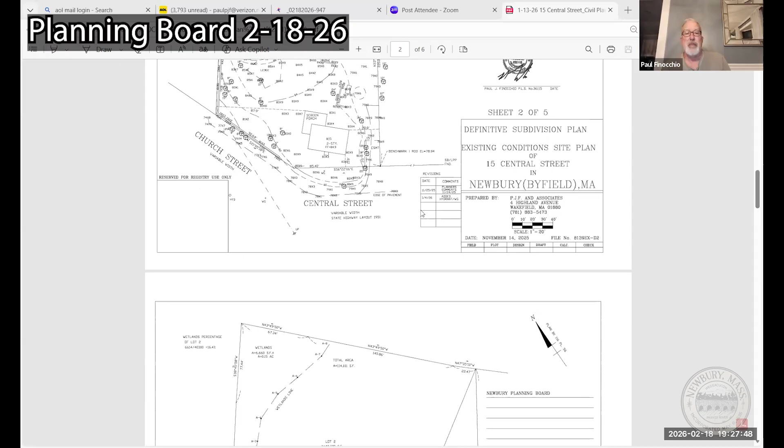Page 3 is a by-right plan showing a 50-foot layout with a required cul-de-sac turning radius. This is showing basically the 2 lots, showing they can do this as a by-right plan without asking for any waivers.

Sheet 4 is a proposed subdivision showing the roadway coming into the site. We'll be having access at the end of the site to the second lot over here, which will have the proposed duplexes. And this will be the existing lot carved out for the new house beyond this side.

This is the definitive site plan. We'll be showing access coming into the site, dead ending. And then we have a duplex location here with a septic system somewhere located out in the rear.

The road is a 22-foot wide paved area coming in. We do have a 34-foot radius paved area here that was required by the fire department. And also we had to make sure that we did not hit or come close to an existing utility pole out front.

There will be retaining walls along the roadway area. Those will probably be cut out in the ledge, so we're not sure on exact height once we do start cutting and seeing how stable that ledge material is.

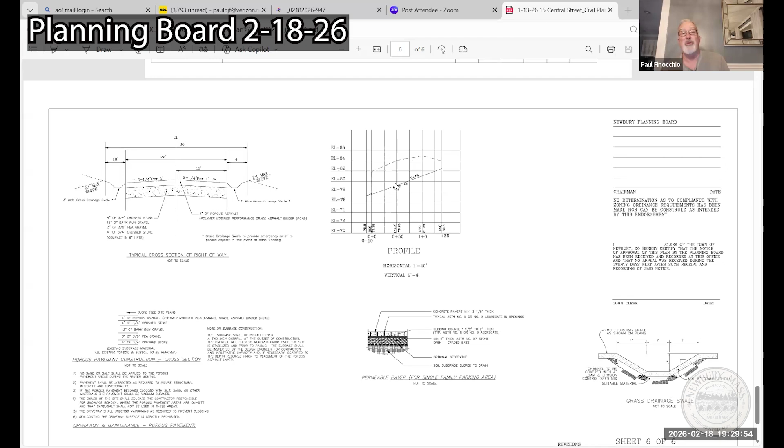Sheet 6 is basically just a detail. Again, we will be changing the pavement from a porous pavement to an impervious material. So this is just a detail sheet, showing the roadway profile coming into the site.

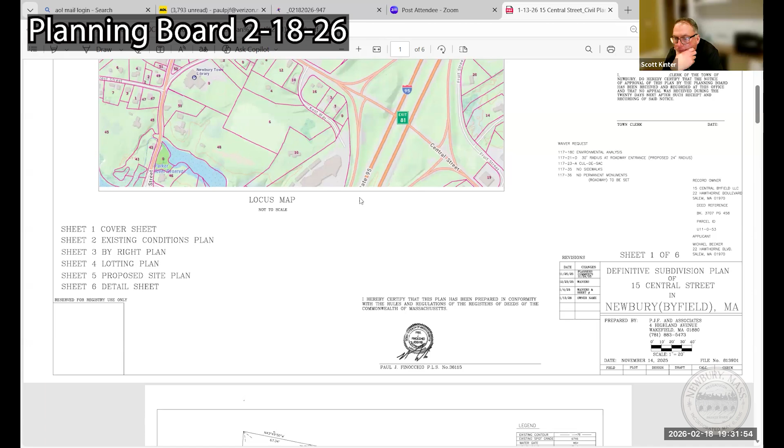Hold on one sec, please. Mr. Rogers, if you can't get in, please call back in, okay, and speak up. Yeah, I'm right here connected, so I can hear you, and I'll turn my mic off now. No worries, and if you want to raise your hand, it's star 9. Thank you so much. No worries, just want to make sure you're able to participate. Yeah, thank you, I'm sorry about that. If you want to answer Scott's question, I apologize. I just want to make sure the public can respond.

So to answer the question, Robert Grasso on October 29th, 2025 did the soil testing, and Deborah Rogers witnessed the soil testing as the Board of Health agent.

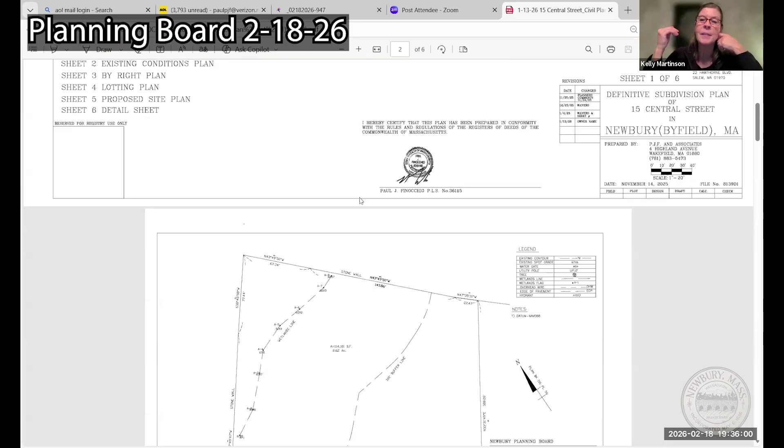Can you just say your address again, Kelly? 11 Central Street, Unit 3. I'm in the church, the old church.

Is the mailbox located across the street from your residence? Yes. I mean, we can work with you to find a location for the mailbox. If it's where we're showing the driveway to go, we'd have to relocate it, but we could work with you on that.

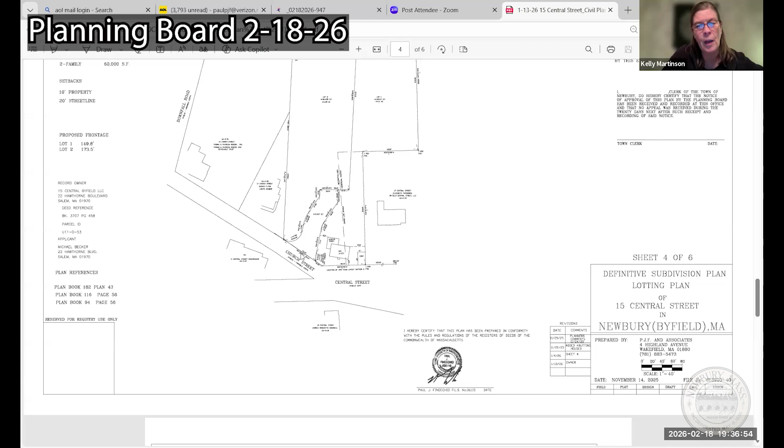Any other questions, Kelly? Well, there was already a car accident from the next door neighbor, the house that's pending. There was a car accident from that neighbor pulling out of the driveway into our neighbor's car a few months ago on the street. So I just want to say that there is a little bit of congestion there. Then it would be 3 driveways. Congested, do you know what I mean?

And Church Street's a one-way there, correct? Correct.

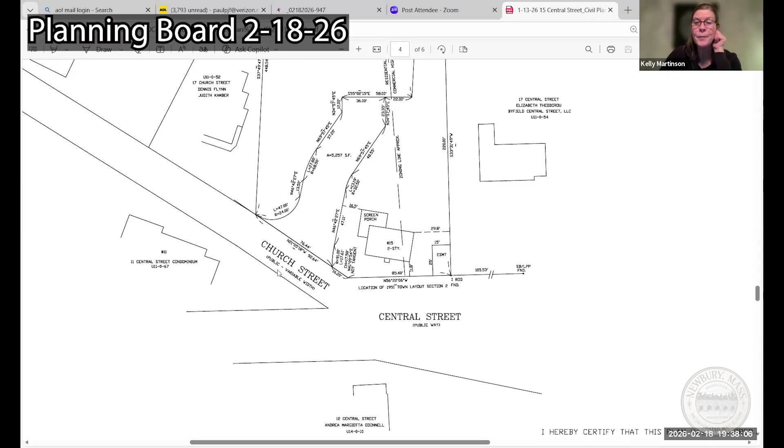Any response from the applicant on that? I'm not sure exactly where the mailbox is, if it's located across the street in this area here, right where the driveway is proposed. Well, here's the roadway right here. I don't know if you're looking at the screen, and then this is number 11 Central Street, and I think the parking is over on this side and here, but I don't know where that mailbox is per se. Yeah, they're all on that side of the street because it's a one-way. Okay, then we would have to relocate the mailboxes at some point out there. Paul, was that shown on the existing conditions plan? Do we know if it's to the right or to the left of the telephone pole? I didn't pick up any mailboxes.

Woody, if I could ask a question. Yes, go right ahead, Pete. So the question is to Kelly, do you have to back out of your driveway? Is that kind of a navigation issue, or is there a route? Sometimes, and when there's snow and snowbanks, it probably makes it much more challenging. Definitely, we have to back out when there's snow. Thank you.

Well, I would think opening this up would make that less congested if you're backing out of the driveway, where right now there's a retaining wall and mailboxes. This would add space to maneuver with the street being open there. It would not for us, no.

Any other questions at this time, Kelly? No, that's it. All right, thank you for your comments and your participation. Thank you, appreciate it.

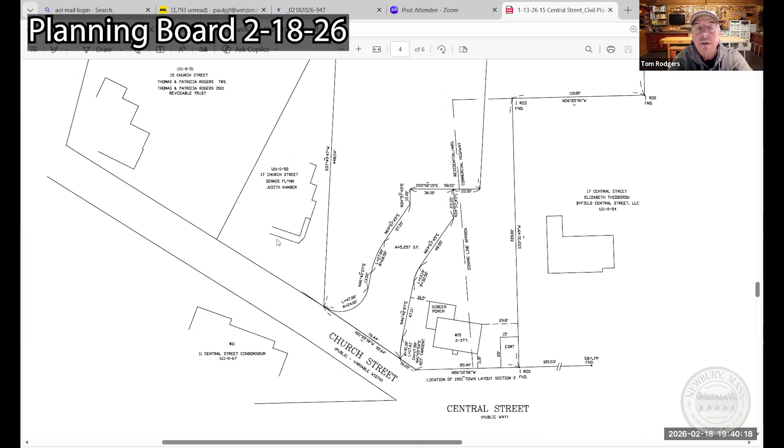Thank you. I am Tom Rogers. My wife Patricia and I live at 15 Church Street, which is 2 doors down from the property we're speaking of. So when I sit in my living room looking out the window, for 40 years I've been looking at woods. Now all of a sudden I'm going to be looking at a 2-family house. So I have some concerns there as far as light pollution, et cetera. The other question is, it's pretty clear to me that you're going to have to take down a lot of trees to make this project happen. Can you say how many trees you have planned to take down?

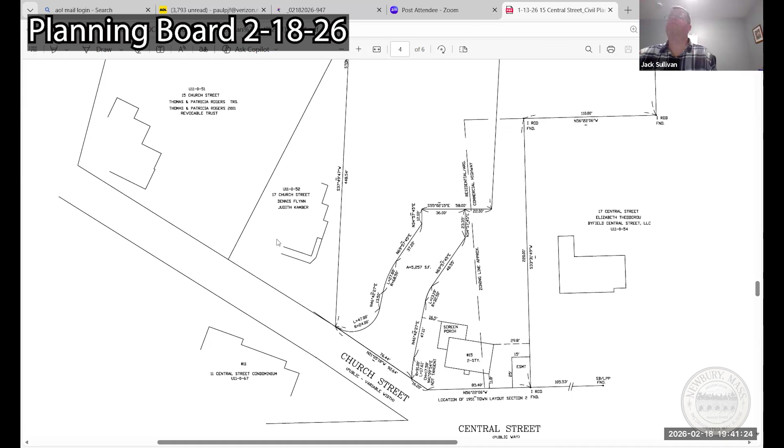If the applicants want to respond, please go right ahead. Paul did a survey of the number of trees that are on the property. Also, there's pretty significant topography behind the retaining wall, where the old driveway was, so there's a pretty large ledge outcropping. Paul, if you can scroll back to the existing conditions. The house will be on the far side of the ledge outcropping, and those trees in front of it and to the left of it, anything that's outside of the road, as long as it's not right next to the road, will remain. So there still will be screening between Central Street and where the proposed duplex is. The duplex will be on the far side of the rock, which, Paul, you could say better than I could, but that rock's got to stick up probably 10 feet on top of the several feet of ledge that the height of the ground is above the street. Correct.

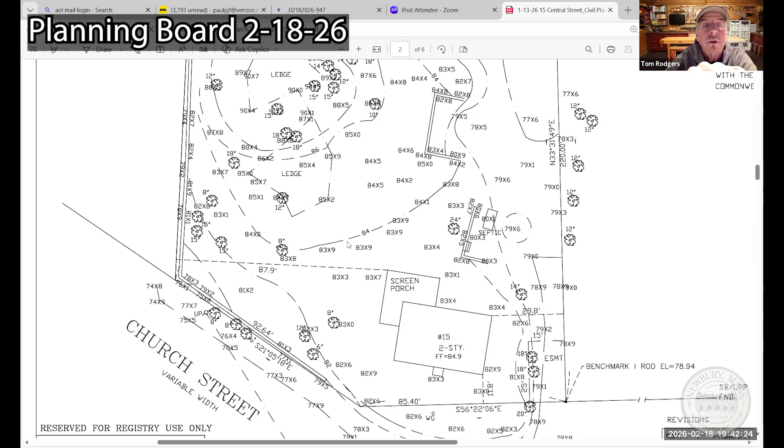So the driveway's coming in the front here. I've seen trees all where the driveway is. And then you come up to the ledge, and then beyond the ledge is where the two-family is located, right in front of the existing shed. So I'm looking at, the two-family is approximately close to where the shed is, behind the ledge outcropping, but that entire mass as you come in is ledge.

Correct. Okay. So, and you have no plans to take down any trees past where the shed is? Do you mean to the right of the shed or to the left of the shed? To the east of the shed going back. I know you got a leaching field - looking at this plan on the left, there's the leaching field area there.

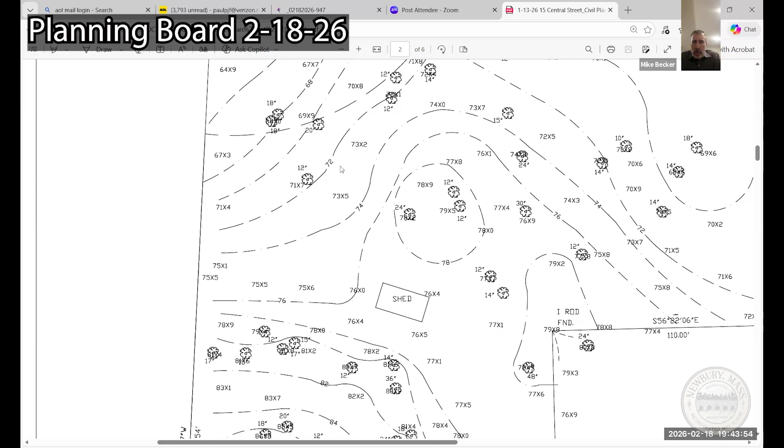So you may have a tree there that's got to come down, but further on - one of our other abutters, Gary Scovert, lives over on Johnson Lane. He is unfortunately out of town and couldn't get on the Zoom meeting, but his main concern was how many trees were you going to take down on the back of the property?

We're basically not going much further back than what we're showing right here. So we didn't pick up any trees beyond this area. It's a fairly wooded site out through here. Our activity is basically right in through here for the house, for the duplex, and the septic field would be right up in this area. And our roadway comes in right in through here, right next to this existing old foundation, and right back in here.

Okay, so this whole area will basically stay. These will probably stay in through here, and then we would have the duplex in through here, and the system somewhere out in this area. Okay, very good. So it sounds like, is it fair to say that you're only taking down trees where you have to build something? Correct, that's fair to say.

In addition, we'll be abandoning the old driveway to the east of the existing house, and we may add some trees there just to kind of screen the house from the gas station, which is a less than desirable view from the house.

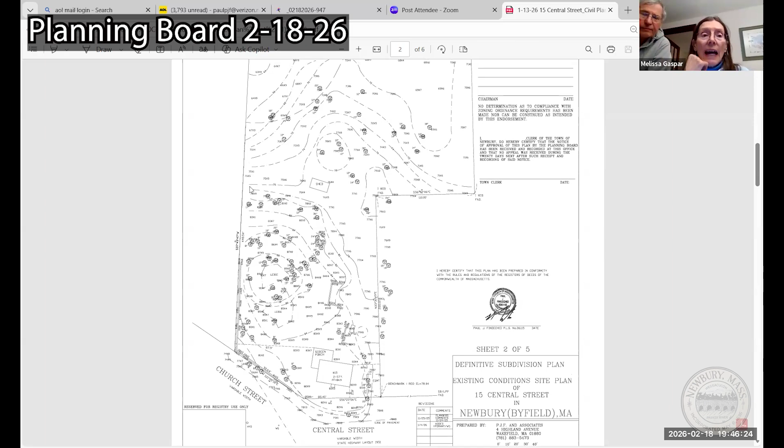We have another raised hand, I believe her first name is Melissa. Hi, your name and address please? Larry and Melissa Gaspar, and we're at 3 Johnson Lane. Okay, thank you, we're behind this property.

But I have a few concerns. One is this was sent to 28 abutters, and I know that because we didn't have the code to get in, there are other people that wanted to be on this call. I tried to send the code out. We were not given agendas, so we did not have the code. It wasn't on the Newburytown website. So I feel like you don't have a fair representation of the concerned people that live near this property.

And so that being said, my number one concern is this driveway. And I wish that somehow, if you were going to build this, you use the existing driveway, because there is a line of sight that gives motorists time to slow down and let a car enter.

That original driveway that's off of Central Street, people can actually see when cars are coming out there. When you take this oblique angle to go down Church Street, you cannot see where your proposed driveway is until you're in front of it.

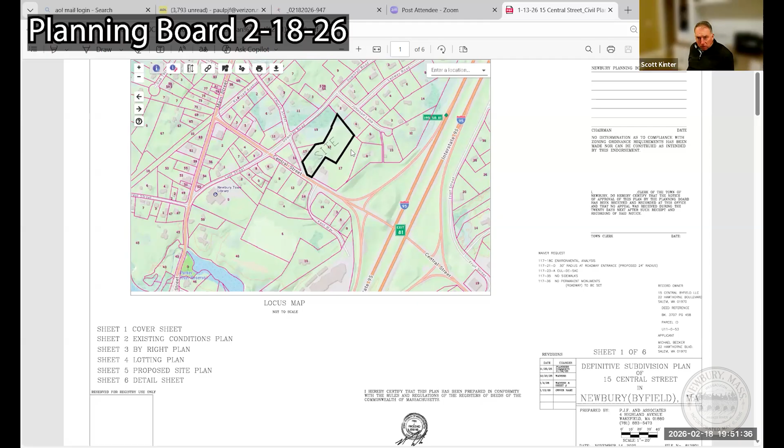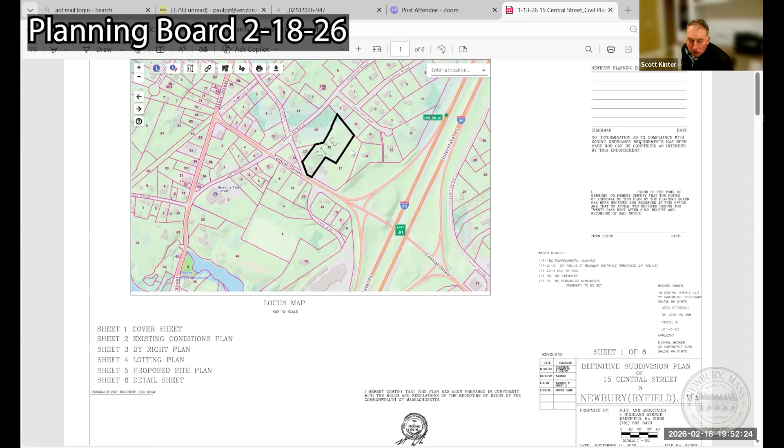Yep. Chris, do you have anything to say? Well, we still are not able to hear you, unfortunately. You're unmuted, Chris. Is it possible that your microphone isn't on? Oh, he's muted now. Unmuted. Hey, Chris, you could probably keep your video on and then use your cell phone to call into the meeting. Okay, let's see here. Chris, you could use your cell phone to call into the meeting. Yep, I'm looking for the number now. It's actually Bill who you're seeing. Chris is behind him.

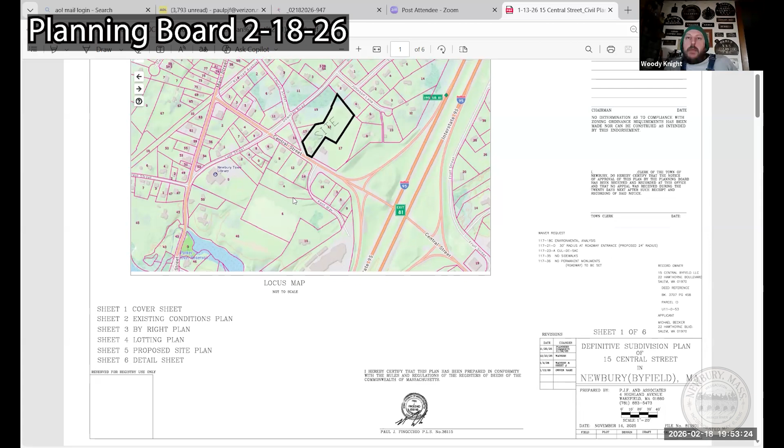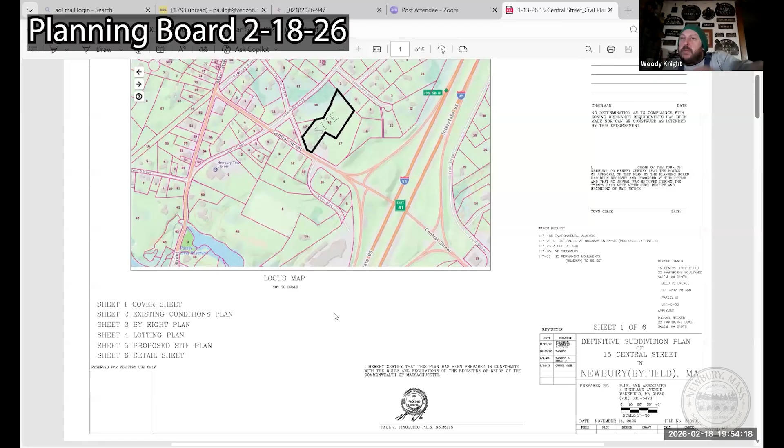Not working. All right, you don't see him yet, Kristen? It looks like he's trying to call in, but it's not getting through. Okay, we'll give him a moment to try and respond. And Bill, if you get through on the phone, please just speak up. Is there any other raised hands at this time, Kristen? I don't see any. Kelly? Oh, sorry, I just didn't see it.

I just want to add to what Melissa was saying. I moved here a year ago to 11 Central Street, and it is strange that some folks do really bear right on Central Street at a high speed. So choosing your driveway cut in should be carefully chosen.

Okay, thank you, Kelly. I mean, it's a little crazy at times, so.

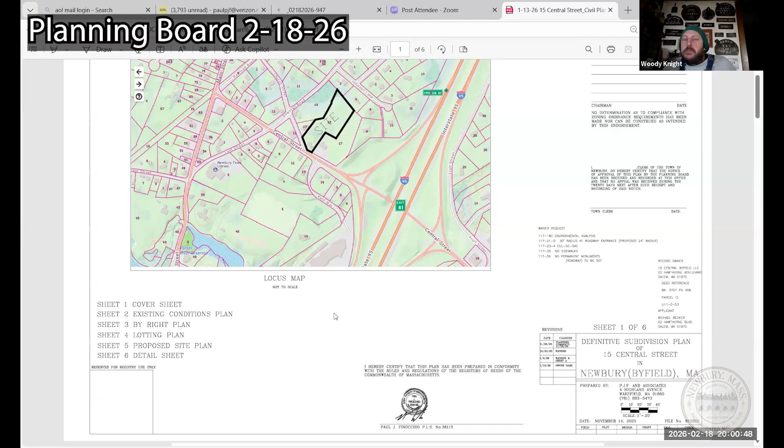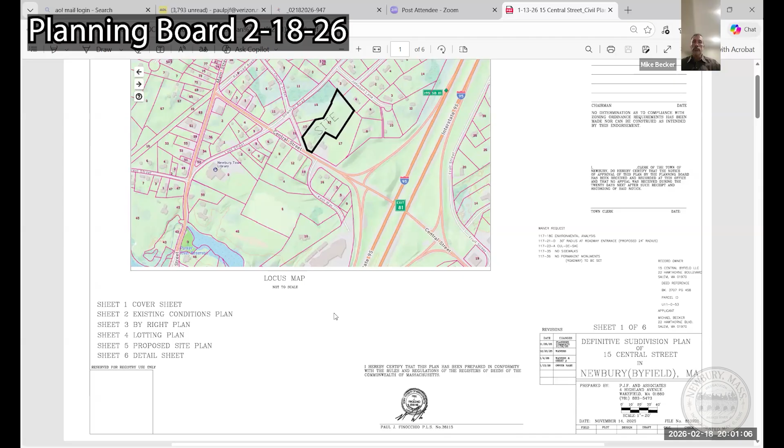Joyce Stair, 8 Johnson Lane. Can you hear me now? Yes, yep, okay, loud and clear.

Our property abuts the property behind the gas station. So when we're sitting at the end of our house on the porch, we look out across the back lot behind the gas station onto this property that was St. Heliers. My big concern is, for our view, how many trees are coming down. We have a wide open space, which they keep very nice, but right now we have a lot of trees on that property, and I'm concerned how many trees in the back along that area would come down. I know you have to take some down to put the house up. And are you planning, I couldn't quite tell, is the road going to be a cul-de-sac? In other words, when you go in, will it go around the duplex or in front of the duplex, or is it just a straight road going in?

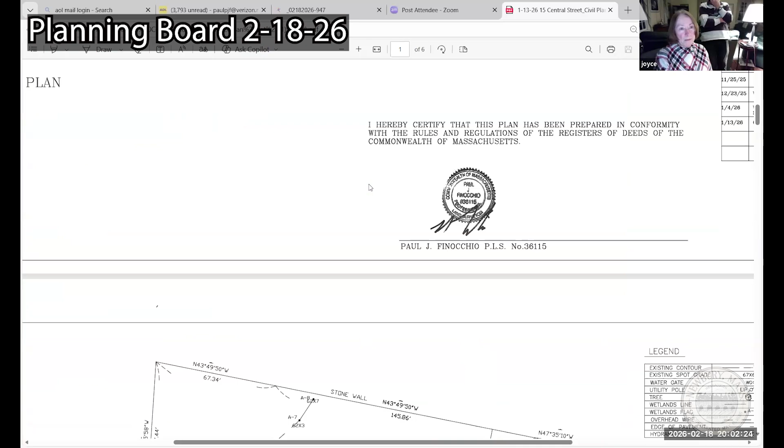Your response please, Mike or Jack? It's just a straight road going in. Paul or Jack, you can answer the question — we're leaving, I think, a couple hundred feet to the back of the property with the trees intact. But Paul, that section you pulled up shows what we're not going to alter. Could you give me a dimension on what that is?

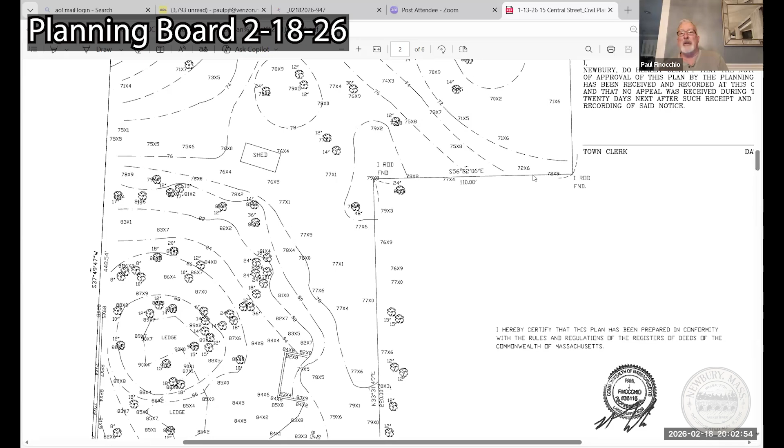The lot line along this side is 110 feet. So we're proposing — hold on a second, let me just get to this one. So our property is up over in this area, up back over here. And our house, the proposed duplex, is probably about 130 feet away from the lot corner of the gas station.

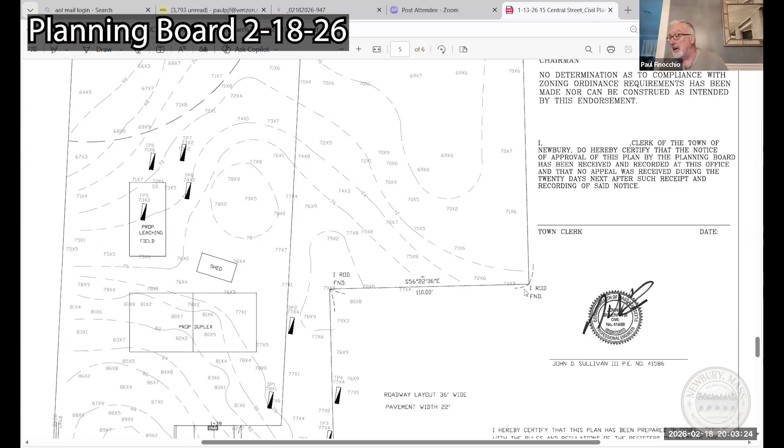And on a diagonal, according to — let me just go back to the original. I believe this is your lot right here, if you can see the screen. I don't see it on the screen. What number is your house? 8 Johnson Lane. Okay, so I think this is number 8 here on the locus map — can you see it or not? I believe this is number 2, 4, 6, and then 8 coming around the corner.

Johnson Lane — we abut the exit, we're right along the exit and the gas station. Right, so this is the gas station here, and this is, I believe, your lot here because it shows number 8 on the map.

Can I ask a question — is there a button I'm supposed to hit? Because all I see are people, I don't see what you're looking at. I'm sharing the screen, so I don't know what you have to hit. Sorry, there may be — it says switch to gallery view. I'll tell you what it says after you switch to gallery view. Switch to active speaker — if you switch, I'm using a tablet so I touch it, but if you use your mouse, up in the top left-hand corner it will say switch to active speaker, and the active speaker is the one who has the map up, I believe. It'll say switch camera and switch. All right, so you can see what he's speaking of.

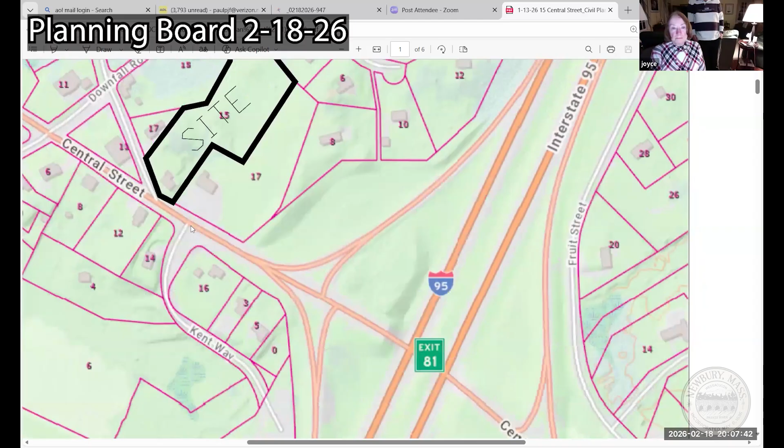Right, so as I said, this is your lot right here, this is the gas station lot, correct, and this is our site. And the roadway will be coming in here, roughly stopping in here, and the duplex is in this area right here. Okay, if I go to the proposed layout.

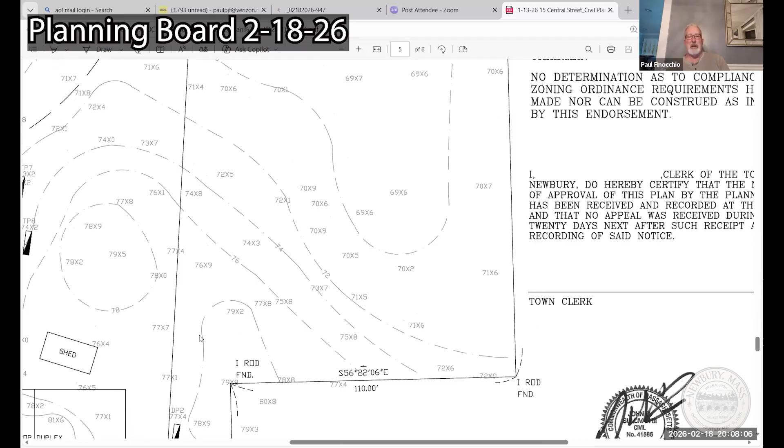So this is basically, we're almost in line with the back property line of the gas station, is where the duplex would almost line up on that site. And your house is located up over in this area here. Right.

Thank you. So we're not looking to do any work over in this area here. Again, the duplex will be here and the leaching field will be somewhere in this general area.

In my recollection, there's some yews and arborvitaes around that back corner of the gas station, past their building. There's already some screening between us. I'd have to be out there to tell you exactly where it is, but there is the existing gas station building and then some screening to the right of where the building would be, that would partially obscure your view, certainly obscure your view of the street area anyway, if not a good portion of the building that's proposed.

Thank you. Okay, all set with any other questions, Joyce? No, that should do it. Thank you very much. All right. Thank you for your participation and your questions.

Thank you. Do we have any other raised hands? I am not seeing any yet. Okay. Nope. Planning board, do you have any questions? Have any questions?

All right, hearing none. Planning board, do we want to go on another site walk based on the information we've heard tonight?

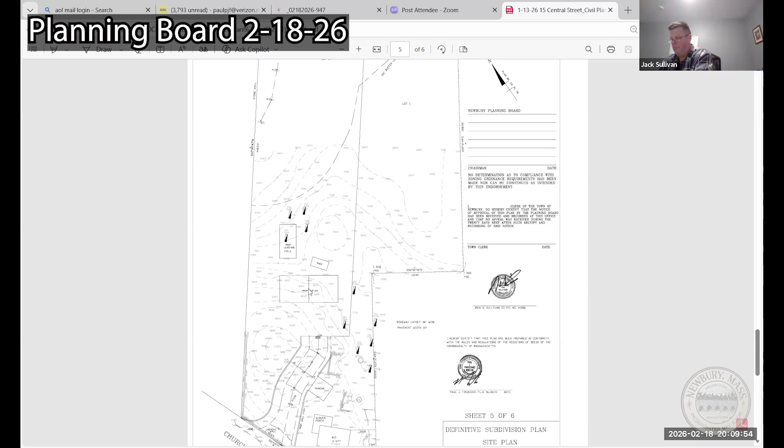Oh, Woody, I think it might be beneficial to take a kind of a feel for the line of sight and an appreciation of the traffic entering onto the roadway and the people backing out of 11, to make sure that this makes sense. And it might be beneficial for folks to take a look. Whether we do it collectively or we do it individually, I think it would be appropriate.

Okay, Larry or Scott or Steve, do you have any interest in going for another site walk there, or do you want to go there and look at it individually? I'm kind of polling you guys now.

I would say, would it be either or? We could organize a site walk and collectively we could try to all be there, and if we can't be there at the same time, we could do something individually. Those are my thoughts on the site walk.

I have a couple of other questions. Well, go right ahead, Scott.

Well, just to recap, I guess some of the questions or concerns from the folks that have talked. I think Mr. Rogers had some questions or concerns about potentially, or maybe a request to add some evergreens, either at the property line or a little inboard. Is that correct?

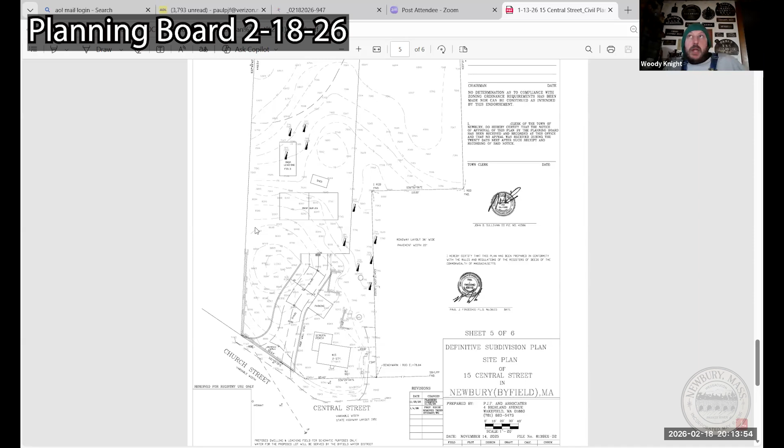I also have a question, and I forget whose comment it was, so my apologies, but it would be helpful to hear an answer for visual later. That driveway, is that going to be... you mentioned a retaining wall on Mr. Rogers' side.

Is that going to be cut into the earth so it'll be a lot lower than the land on both sides? Can you explain more about the end of the driveway? It'll be cut in on both sides.

That's all I have for now. Anyone else have any questions?

I'd be for another site walk if we could have it staked out and marked so we can get a feel for it and for the neighbors' driveways. And the end of Church Street would be great. I think Woody, Melissa, Gaspar might have one more question.

Go ahead, Melissa. I think it would be very helpful if you had another public hearing, since there are so many people living either abutting or very close who were not able to attend this meeting. I just think it would be helpful to have more input. I feel like you didn't get to hear enough people's input, since this will really impact this neighborhood. So I was hoping there'd be another public hearing for us to express ourselves, or to hear back after your site walk and look at how the corner is and the traffic flow.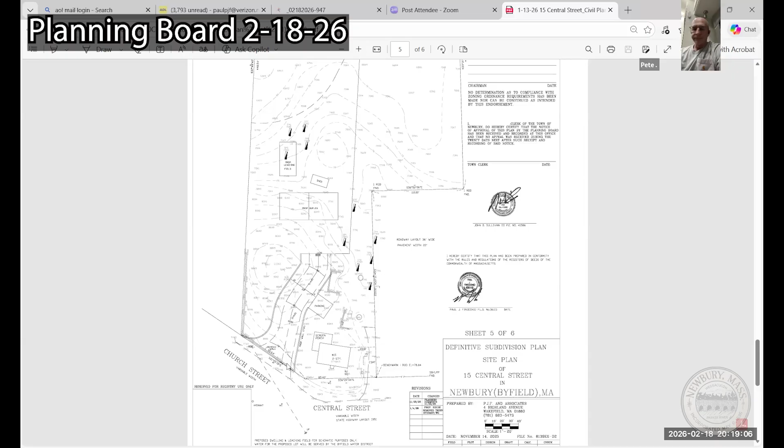I'd entertain a motion to continue the public hearing for 15 Central Street to March 18th at 7:15 via Zoom. So moved. Thank you, Pete. Do I have a second? Second. Thank you, that was Scott.

Roll call vote. Pete? Yes. Larry? Yes. Scott? Yes. And Steve? Yes. And I vote yes as well.

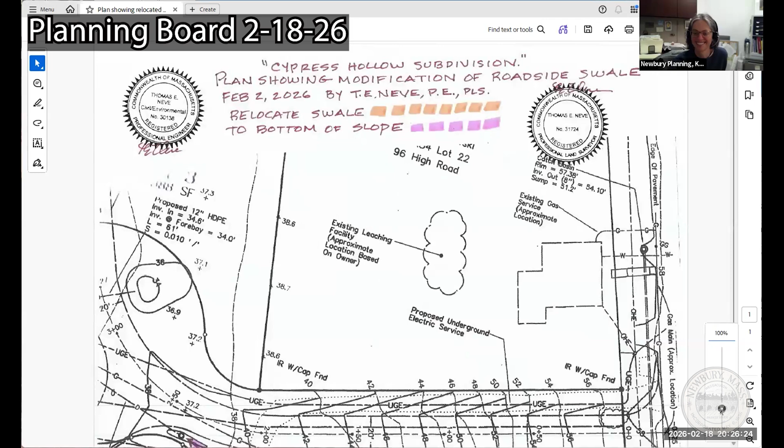Oops, sorry. That's okay, if you could pick it up a little bit. How's that? A little further up. Yeah, not necessarily larger, just the frame, if you can raise it. I think that's okay, kind of the way the image falls. Can you make it smaller? Yeah, I think we'll be able to see it if we can make it smaller. Is that okay? Yeah, that's not bad.

The brown line is the swale. There's a 1 foot deep grassy swale that is going to bring the water from the road down to the bottom of the road, and then it's going to enter the forebay and then go to the infiltration pond. So my proposal is to move that swale from the side of the road to the bottom of the slope of the road and allow the water to run along the bottom of the slope as it intersects the existing grade.

The same path would happen. The path would be in purple as shown on the drawing, with the same exit into the pipe system and the infiltration pond. Nothing has changed at all except the location of that swale. The reason I'm mentioning that is if the folks want to gain access from the house site to the road, the swale wouldn't work because we'd have to put a culvert in and a driveway intersecting our pavement.

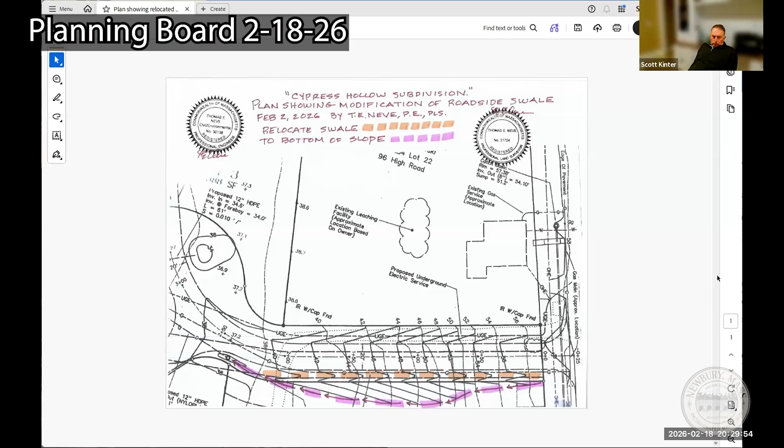Right now, the current road conditions have this road at gravel subgrade, so we did not go any further than that. We have plenty of opportunity to get them connected in the spring, and I think everyone will live happily ever after. I appreciate the opportunity to give you a little preview of coming attractions, and if that sounds reasonable to everybody, that's the course we'll take over the next 4 to 6 weeks.

All right, and I did want to jump in and introduce myself. I'm Neil Swain, one half of the nice couple that Tom mentioned. I don't have anything personally to present to you all at the moment, just wanted to get a feel for the land and answer any questions you might have at this early stage.

Well, Neil, welcome. We're very excited that you're going to be part of the community. We look forward to receiving the proposal, and then the board can act on it from there. Let me see if the board members have any questions. Larry, any questions at this time?

Just a comment, Pete, I guess the question for us will be what level of amendment to the plan is required. Is this a major modification, a minor modification, or even a field change? That's something we'll probably want some input from Joe Swetka on, as to the implications in terms of the road layout and the drainage and all of that.

But that's it, very good. Thank you, Larry. Scott, any concerns or comments? Not a lot of concern. I would think this would be a field change, Larry. And I guess we'll see what Joe has to say.